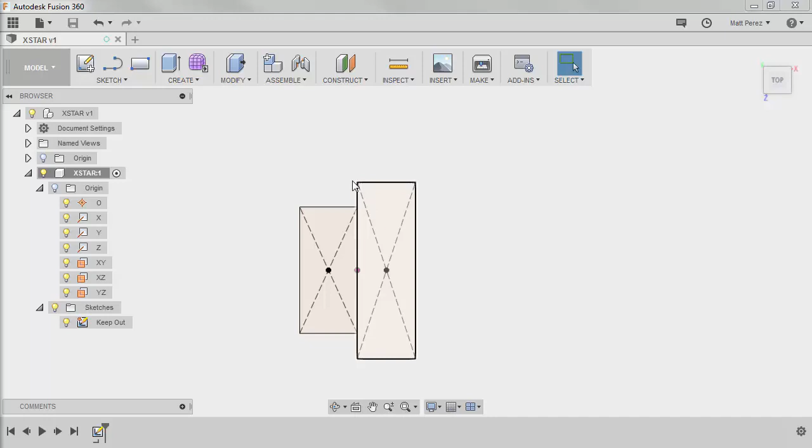So now that we have the battery keep-out sketch, I'm going to rotate a little bit, and I want to create a sketch on the front plane. So again, I like to start my sketches by selecting the new sketch, and it gives me a good idea of the plane I'm dealing with.

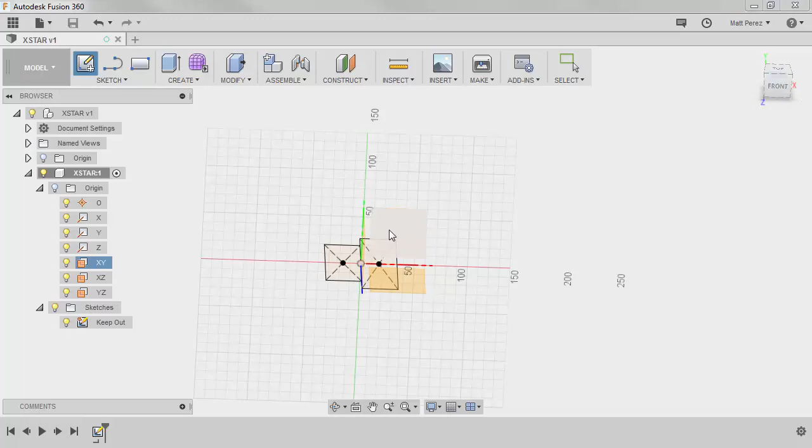If you're ever curious about the plane, when you hover over it, you notice that it highlights it in the browser. So we're dealing with plane XY. And if you look at the view cube, you can see that we're also dealing with the front plane when we select XY. So that can sometimes help.

So for this front sketch, what I want to do is create the shape of the new drone from the front. Now this is not the full solid shape because obviously it's going to be a very complicated part, but I'm going to create a reference surface that's going to give me the top shape.

Now we're keeping this fairly simplified because we want to make sure that we explore a lot of creative geometry. We want to make sure that we learn a lot of the advanced tools as well as how to apply some of the basic tools.

So you don't necessarily have to 100% follow along with what I'm doing, but it's a good idea, especially if you're new to Fusion and you're new to designing, that you follow pretty closely along with what I'm doing so that you don't get too far away from the original core aspects that we're trying to learn.

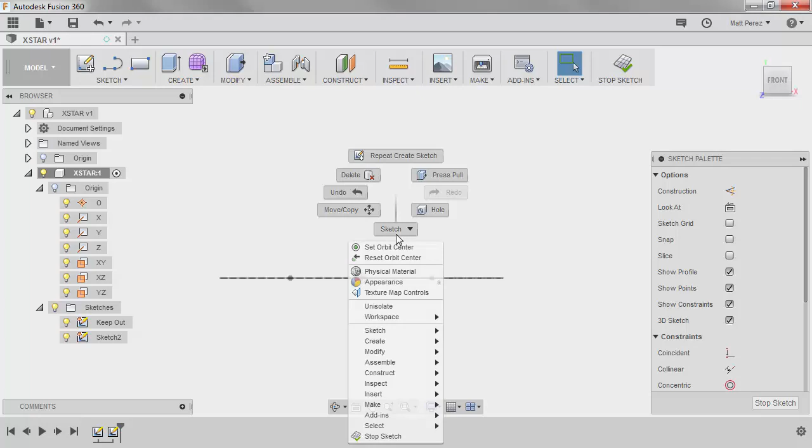So the first thing that I want to do is start a line. And again, you have many options for how you can get these tools. You can use the marking menu. You can go to the sketch option. And once you're on the sketch option, you can go directly to the line tool, which is at the 6 o'clock position. So if you want to do this fast, you just hold down the right mouse button and drag straight down, and you're on the line tool. You can also hit L on the keyboard to hit the line tool, or you can use it directly from the top toolbar. All right, so again, I like to access these with quick keys or various ways.

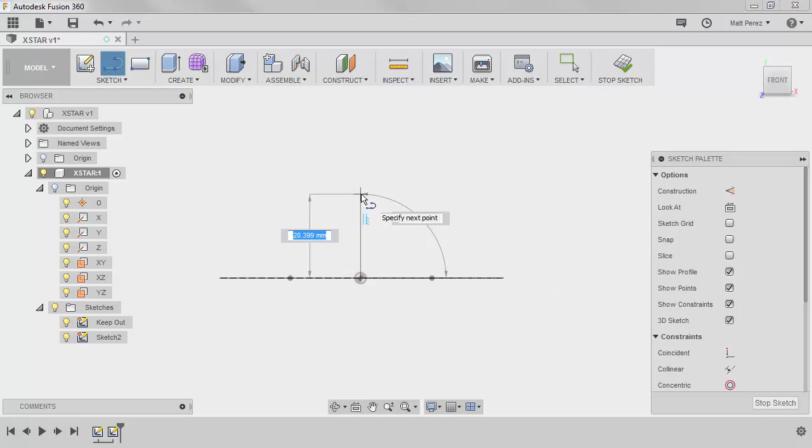So I'm going to use the marking menu to access my line tool, start at the origin, and I'm going to draw a line vertically. I'm going to click, and then I'm going to hit the green check mark. I want to hit escape to get off of that line tool, and I want to take a look at something. It automatically applied a vertical constraint for me, but the line is still free to float around.

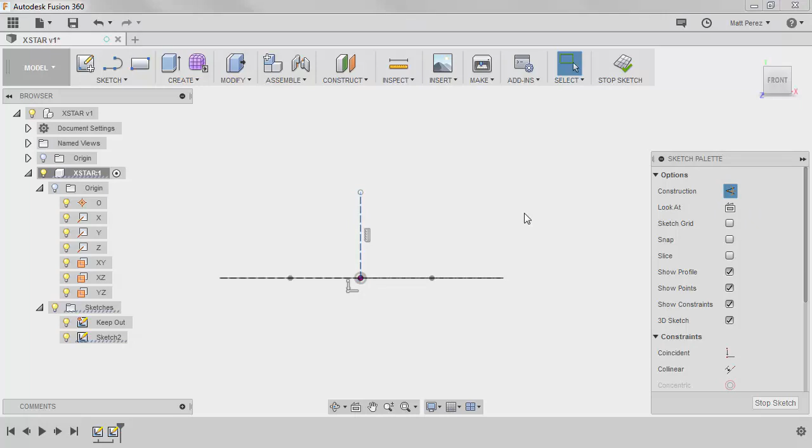There are two things that I need to do with this. First, I need to select the line by left clicking, and then I'm going to make this a construction line. It's only there for reference. The next thing I want to do is press D on the keyboard, and I want to dimension this line. And this one's going to be 76.2 millimeters, and then I'm going to zoom out.

Go ahead and draw one more line, from the point at the top to the left. We made this a construction line after the fact. If you know you'll be sketching construction lines, you can turn the construction option on, and everything you sketch will automatically be a construction line. Just remember to turn it back off when you want to create normal geometry.

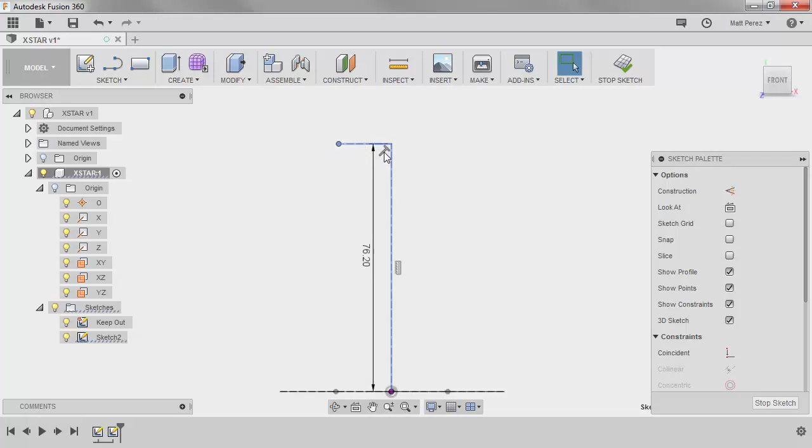This line does not need a dimension. It's only here for a tangency reference. But notice that it automatically applied a perpendicular constraint. So now we have a perpendicular constraint, the points are coincident, and I have a vertical reference here.

You might be wondering where 76.2 millimeters came from. Well, if you remember from our design criteria, we wanted to keep the entire device as low profile as possible. Most of the camera drones on the market are relatively tall for additional flight stability, but we're looking for an extremely agile craft, while keeping it as low as possible. So 76.2 millimeters is 3 inches, and 3 inches is a criteria I gave that I want to try to fit into.

Now, of course, we could make it taller or smaller as needed, but 3 inches gives us a pretty good margin of error in terms of keeping enough air above and below the props, so we don't have restrictions, prop wash, or weird oscillations when taking off. So that's the starting point, and that's where that 76.2 came from.

Again, when you start these designs, sometimes you have to give yourself artificial criteria and see how things fit. If we find out 76.2 is too much or not enough, we can always come back to this sketch and adjust it, and everything else will be based off that number. So 76.2 is our starting point for the center line of our front shape.

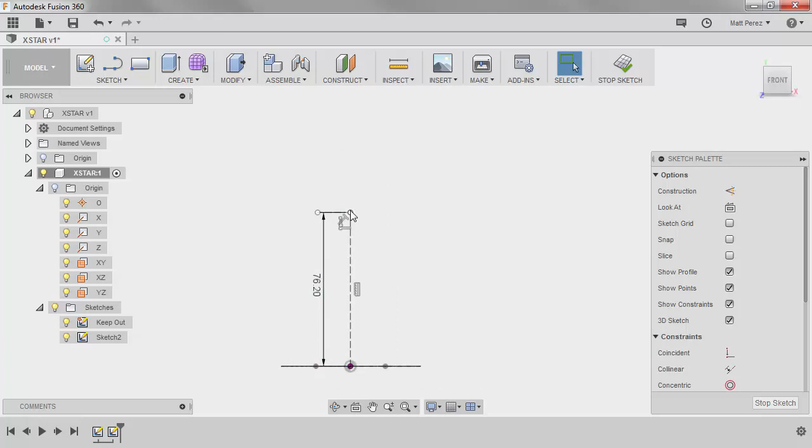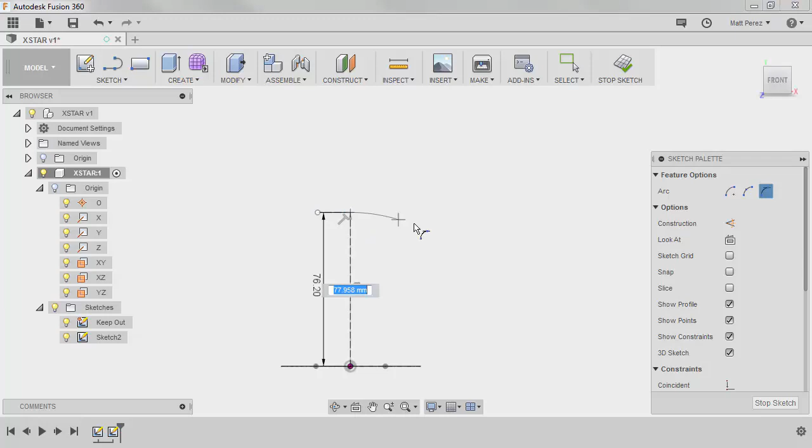We're going to create an arc by going up to Sketch, and we're going to create a tangent arc. The reason for a tangent arc is because we're going to carry tangency from this horizontal line out to the right. If you like to design out to the left, that's perfectly fine, but I prefer to design out to the right. So I'm going to start from here, drag that out, then hit Escape. Tangency is automatically applied because of the type of arc used.

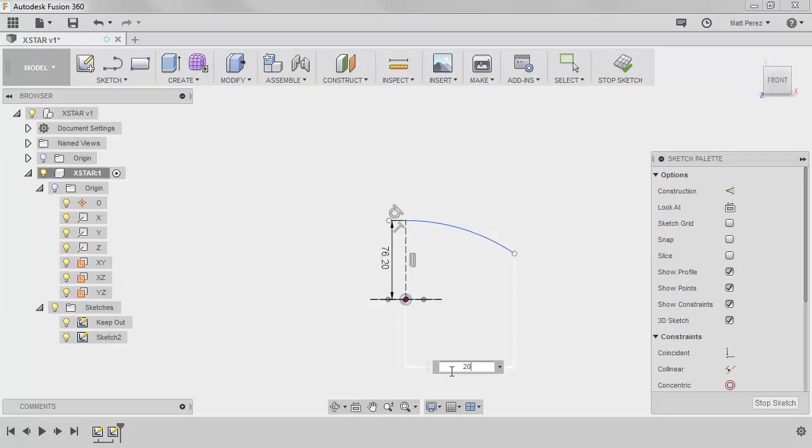Now there are two more dimensions we need to apply. D on the keyboard, and we're going to go from this endpoint, from the origin, or from this vertical line - either one is fine. We want to place a horizontal dimension of 200 millimeters, then give this a radius value of 500 millimeters.

Now again, you might be wondering where these numbers actually came from. The 200 millimeters is because I want to fit within a certain constrained overall size. Remember, we're dealing with half of the shape here, so from the front we have 200 millimeters wide, and it's going to be wider than our overall design.

The radius value is just approximately what looks okay. We want a little bit of curve because we're dealing with a 3D printed plastic part - if we print it flat, it's not going to be very strong. That little bit of curvature gives us some extra strength and structure. So the 500 doesn't really matter here, it could be more or less. It really just gives us a little bit of rigidity to the overall design.

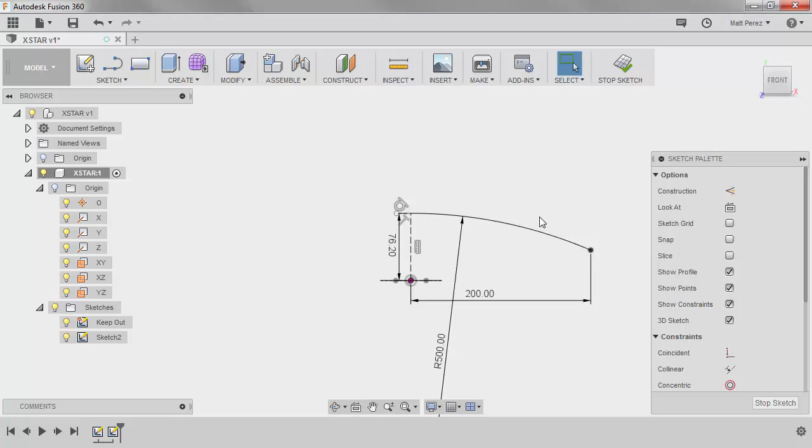Now, if you make that number bigger, you could push the motor up higher and not worry as much about prop clearance. But making the number smaller gives you more curvature, and you'll actually restrict where the propellers can go because you'll start to run into issues where the propeller might hit the design. So again, somewhat arbitrary numbers, just making sure they're visually okay and making sure that 200 is bigger than what we want to design, because ultimately we're going to trim this back.

So let's go ahead and stop the sketch. And again, I want to rename this sketch - I'm going to call this front profile.